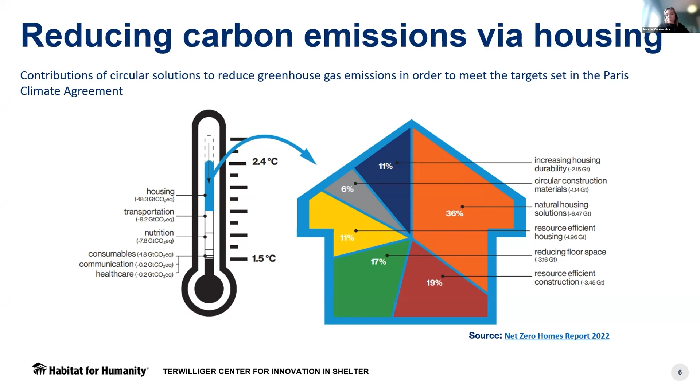What we know as Habitat, and what we've seen in working with these communities, is that the most impacted by climate change are also the most affected by the global housing shortage. Any measure that's going to support climate change, both from a mitigation or adaptation perspective, must incorporate housing needs.

So I'm going to share a couple examples of our work globally. The first example we're going to look at is about energy savings and efficient use of energy in house construction, in a way that engages communities in that solution.

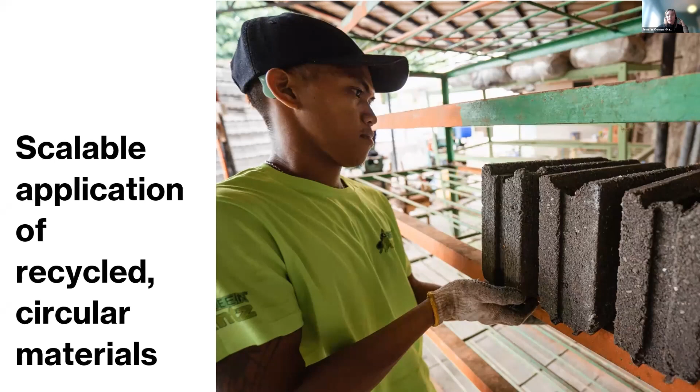The second example I want to draw from is focused on innovation in construction systems and materials, looking really at recycled content and circular building materials. A couple of years ago, Habitat was running our startup accelerator, supporting young entrepreneurs, and we found that about 25% of all applications worldwide were coming from recycled or circular materials, with a strong focus on recycled plastic and its role in the built environment.

The idea is to take plastic waste that wouldn't otherwise be recycled, or has essentially no value, and encapsulate it somehow in building materials. In Costa Rica, we partnered with CRDC Global. They have a RESIN8 product, which is a concrete additive that can be incorporated into all kinds of building materials, and we partnered with them to build homes in Costa Rica.

And in the Philippines, on the other side of the world, we worked with Green Antz, pictured here. This doesn't look like a plastic brick the way you might imagine, but it has incorporated plastic waste into the brick through a proprietary mixture, displacing some of the cement and sand additives.

Why is it blocked? Okay, let me try to open this. Sorry, I'm just trying to figure out why. Why can I not open it and move it? It looks like it's on the right-hand side. Do you need me to show it for you? Maybe that could help, because I don't understand why it's doing this. Okay, I can try. I think there's always going to be some technical issues, so I'm sure we'll find a solution. Oh, okay, now it has moved. Now with sharing, Sabina, you're sharing. Okay, fine, let's do it like this.

So I'm going to focus on nature-based solutions integrated into the urban fabric at many scales: healthy green buildings and communities, linear networked 3D greening.

Life outside buildings is as important as what happens inside them. Trees, water, light, and earth combine to create a public realm that is rich in natural green life. The well-being of those who live and work can only be enhanced by such a close relationship with nature.

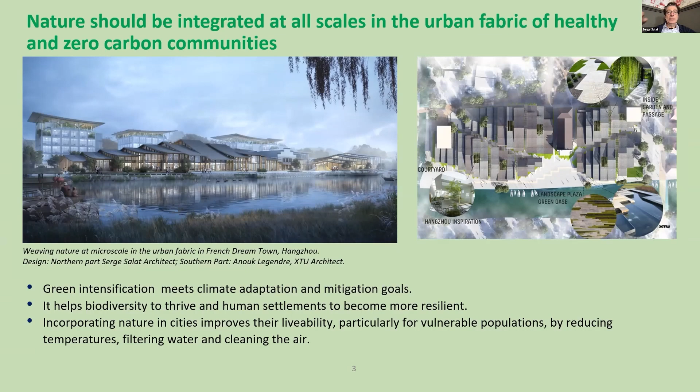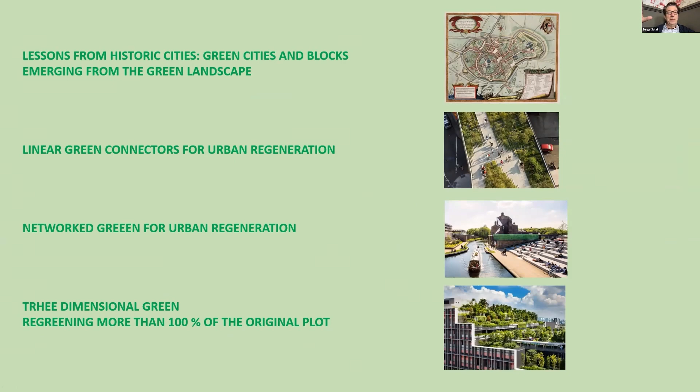There will be 4 parts, and I'll try to go through this in 10 minutes: lessons from historic cities, green cities and blocks emerging from the green landscape, linear green connectors for urban regeneration, networked green for urban regeneration, and 3-dimensional green, regreening more than 100% of the original plot.

First key message: historic cities were totally embedded into the natural landscape. They were not like now, totally sprawling everywhere and totally segregated. From everywhere in the city, this is Firenze, you could see the nature, you could see the fields.

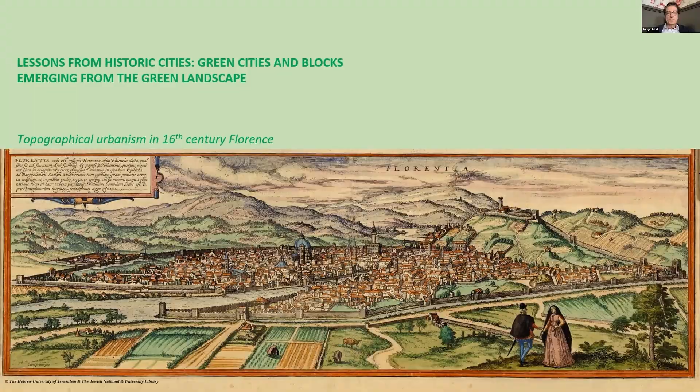The fields and urban agriculture were totally integrated, and the water was totally integrated too. I am in Bruges at the moment, which is a water city like Venice. The green, as you see here, you just have the center of the city. You have houses, I'm speaking from one of these house types at the moment. It's absolutely wonderful. The houses were along the blocks, along the streets, and the inside of the block was entirely green and cultivated or with beautiful gardens.

And this is the right way to build cities, actually: to have streets, houses along the perimeter of the block, and a super green block inside.

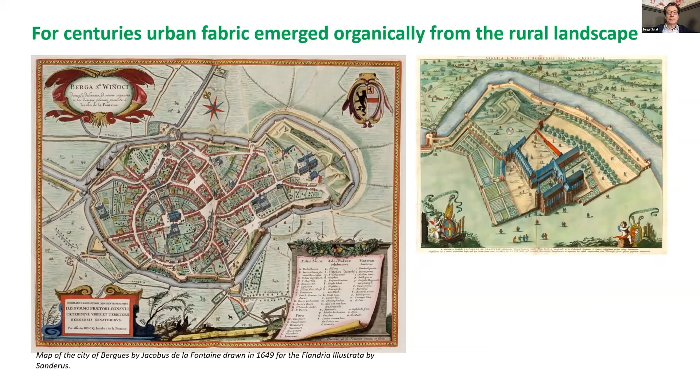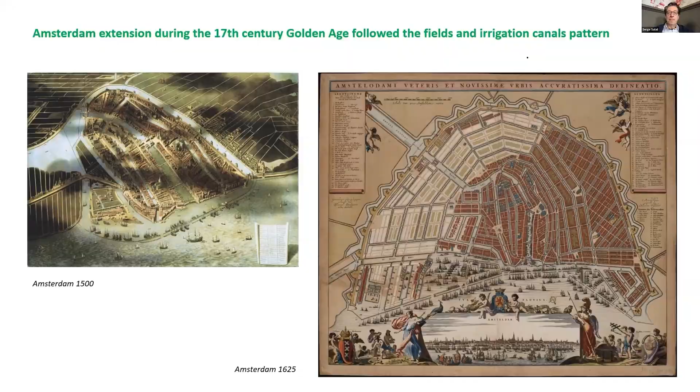When you move in Amsterdam, you may feel that you have the canals, you have the facade, but this is the inside of the Amsterdam blocks. And as you see, it's entirely green, but at the same time well-defined. It's a very urban environment.

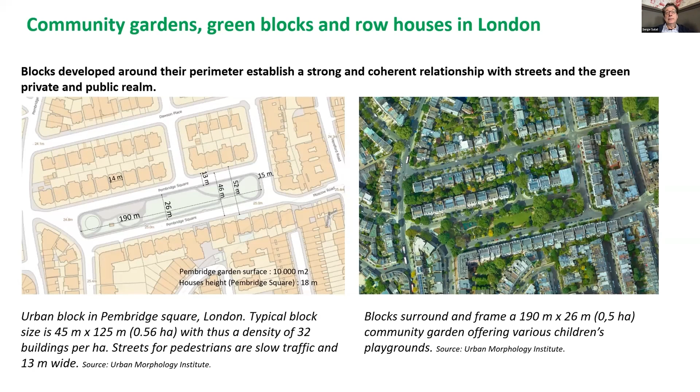Some benchmarks here: this is in London. You have these row houses again, where you see the layers of green, like we have done in the smart city in Hangzhou. You have layers of green behind the houses, and a common park in front of the houses, a small pocket park, 190 meters by 26 meters, but with a strong variety of different ecosystems and of different ambience and environments.

Okay, and this can be perfectly recreated in, this example was mid 19th century, but this can be perfectly recreated in contemporary green blocks like in Hammarby Sjöstad.

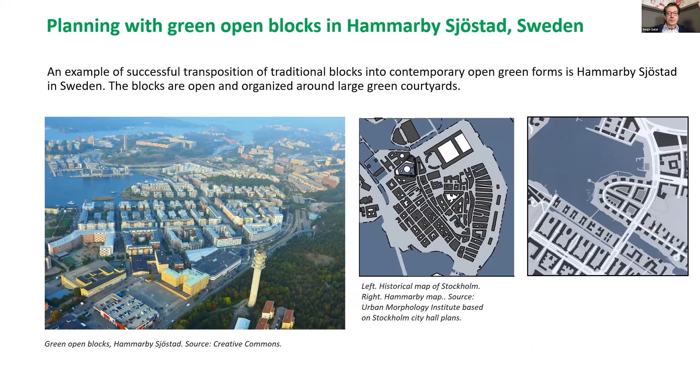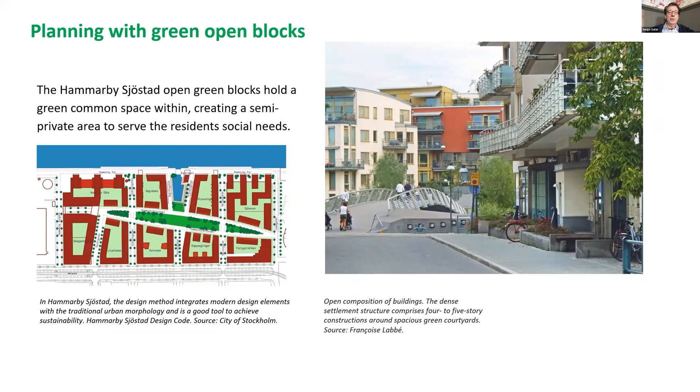Okay, where you see this is a quality program, and you see the same absolutely principle with a contemporary design, which is applied in an eco neighborhood in Sweden, with a common garden, with the inside of the green blocks, and with everything I've been showing you in London.

Urban linear green for urban regeneration. One key message I want to share with you is that green should be connected. And to connect green, you can make it linearly. This is High Line in New York. We're going to go fast on it.

The second key message is also that green is not just an informal piece of nature. Everything I've been showing you at the moment is very well designed, and the High Line is very well designed with different, it's imbrication, it's interweaving of architecture and green. It's not just that.

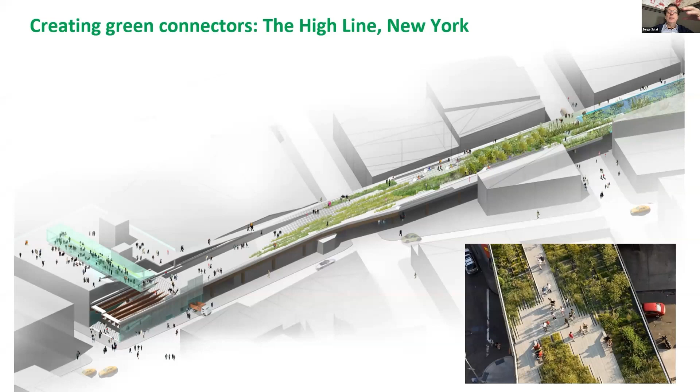And with also different ambiances, different atmosphere, where you can sit, you can relax, you can walk. You have different patches of a more wild environment and more natural environment. But then you have social activities. The third picture starting from the left, then a more dense New York environment. And this is what creates it - it's not like putting a piece of a forest inside of the city. It's really about designing the nature.

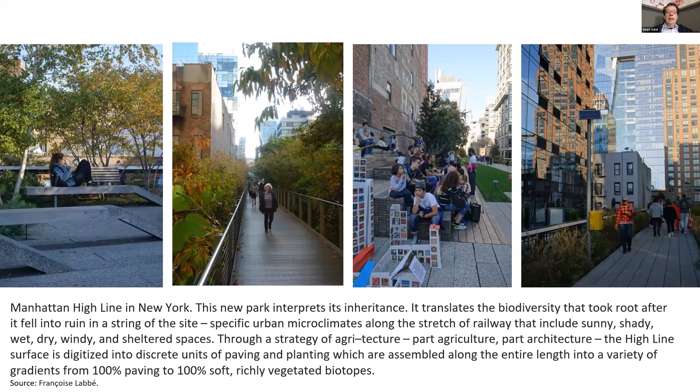And here you see the different ecosystems: the pit, the plains, the bridge, the mound, the ramp, the flyover, and this ensures the high quality of this linear park.

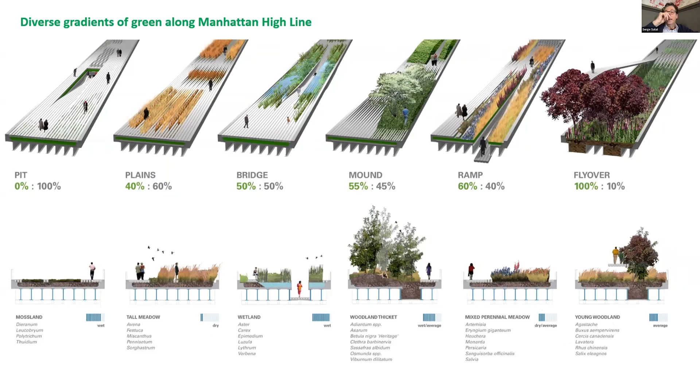What I want to really stress is the difference between the green space, which is something absolutely meaningless, and the park or garden. A park or garden is green space plus design.

Okay, and here you see the work of the architects and landscape designers.

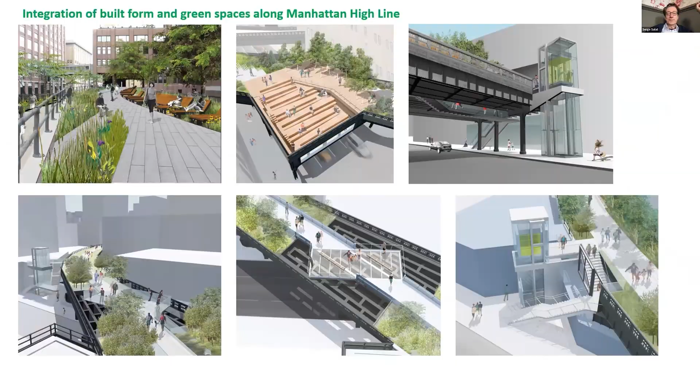Okay, now networked green. The example here won't be the High Line in New York, but will be King's Cross in London.

But you have 78 hectares of public green space, 28 parks, 2 cemeteries, 60 green spaces, plus 235 private open space, comprising 88 private squares, like the one I've been showing you in Pembridge Square, the one before. Gardens accessible to surrounding residents.

And then you have each park with its individual history, landscape features, user group profile, and local community. And each park is different. It's a different feel and essence. It's not just greening the side of a highway like in many Chinese cities.

The borough totals 166 hectares of green space, 14% of the land area. But when you had the big parks like Kensington Gardens or Holland Park, which are really accessible on foot - I have been living in this area, so I know very well - you have a total of 36 square meters of green space per resident.

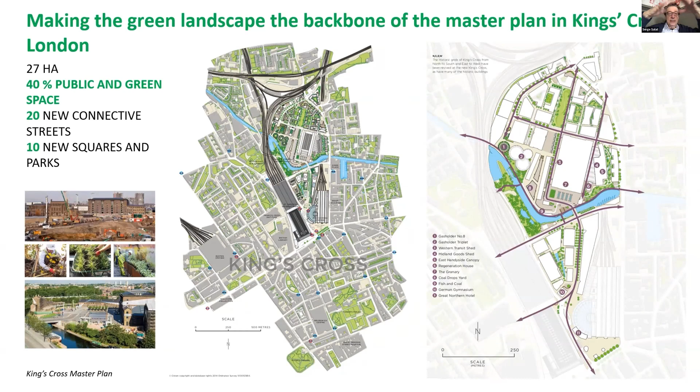And this is a legacy of history. But in a new project like King's Cross in London, the choice was done by the developers to devote 40% to green space, but not like a big park in the middle of the development - really to weave and create 10 new pocket parks inside the development. Here you see the master plan. And here you see that, oh, all this is an entirely new creation.

Yeah, and here you see the different ambience. Pancras Square, which is triangular and which has water getting down, sloping down towards the tower, the clock tower of the station.

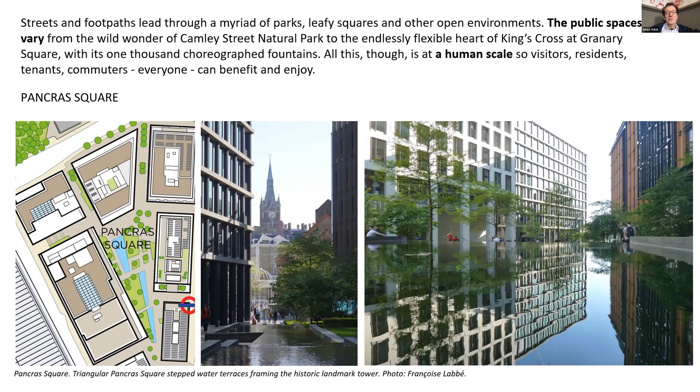Here you see the 1,000 fountains, which is also a garden of water in front of Granary Square. They have kept 10 heritage buildings. It's a small area, 27 hectares, but you have 10 heritage buildings. Here on the back you have the gas holders, and it's super people-centric.

You have some more formal areas, and you have the very rich ecology, and the Camley Street Natural Park, which is like a small stretch of nature right in the middle of London.

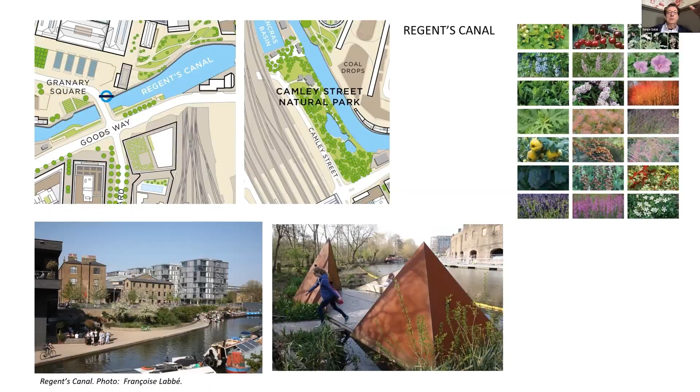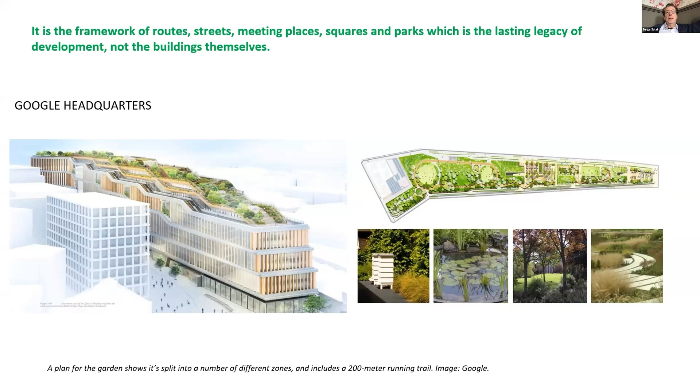Along the canal, which has been created at the time of the railways, you have Lewis Cubitt Park, and so many materials, and then you have this garden, which is like a work of art, which we have seen. And then you have the new addition, which is the Google headquarters, a 300 meters long garden on top of the building.

And this will be the end, the three-dimensional green. So what is the next step? When you see that, all the green is not on the ground - the green is on the 4th floor and the 7th floor. This is Kampung Admiralty in Singapore, which I like very much.

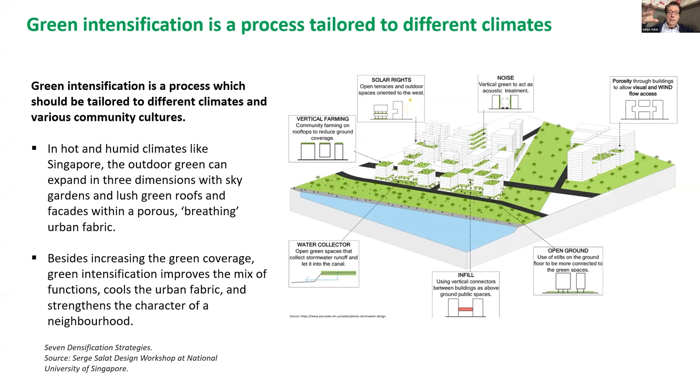Green intensification is a process tailored to different climates. In hot and humid climates like Singapore, the outdoor green can expand in 3 dimensions with sky gardens and lush green roofs, into a porous urban fabric.

This is a project I have done with my students in Singapore. This is a section of Kampung Admiralty, and now you see, compared to the view from the sky, that you have the green and the amenities for the children at the 4th level. It really looks like a recreation of nature, and then you have stacked uses.

It's a super mixed-use area with a food court. You have a healthcare center, the blue one on 2 levels, and then you have elderly and children amenities, and then housing, and a communal farm, which extends vertically from the 4th floor to the 7th floor.

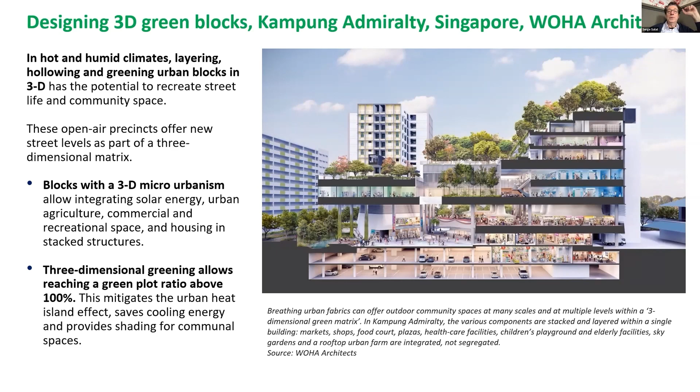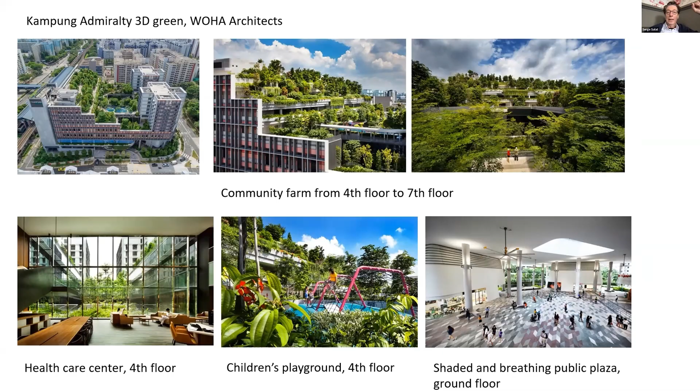This is a project I have been advising in Guangzhou, the Sino-Singapore city. We made with the World Bank and the Guangzhou planners the Knowledge Valley, in which we increase at a bigger scale the principles of Kampung Admiralty in Singapore - of the 3D green. The 3D green regreens more than 100% of the original plot.

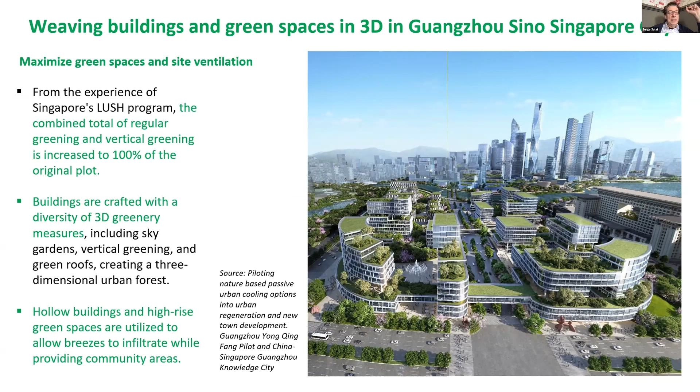Here you have exactly that. Buildings are crafted with a diversity of 3D greenery - sky gardens, vertical greening, and green roofs - creating a 3-dimensional urban forest. Hollow buildings, to increase the flow of air, allow breezes to infiltrate.

It's a hilly micro-topography. We have recreated the 3D landscape in this Knowledge Valley - low-lying areas, rain gardens, wetland parks, a tidal landscape where green areas meet water, and water is fostered. It's a combination of urban space and the recreation of an urban landscape and a topographical landscape.

The architectural design takes the connection with hills into full account. The use of stilts, three-dimensional setbacks, and other techniques are integrated with nature - elevated floors, staggered floors. So once again, design, design, design, design. I've been showing you design from the past to the most contemporary, and you see it's not just nature-based solution, it's designing with nature.

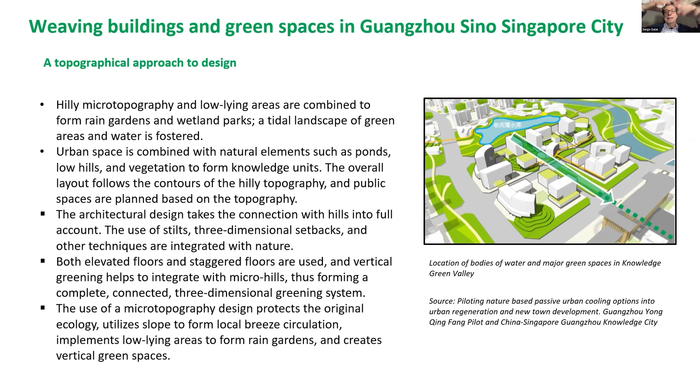Develop master plans around the green landscaping vision - not the classical way of developing a master plan around roads, but developing a master plan from a landscape project. Integrate green spaces with all infrastructural projects - housing, transport, business parks, community and health facilities - and an urban rehabilitation approach. So not just creating a master plan and greening it, but creating the master plan around the green landscape, and engage, of course, the local community.

Have a long-term perspective while remaining flexible. Green spaces are a long-term investment. They may need some time to establish before they are fully usable, and they require long-term maintenance. The benefits may only become apparent over time.

That's why with the World Bank, we make ecosystemic accounting of the benefits, making the case for green spaces, because they cost money actually. You must not think that it comes just for free. But they bring much more benefits than they cost.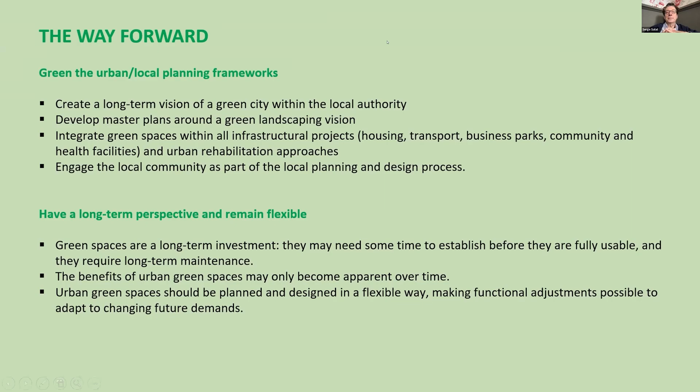Great, thank you, Serge. Thank you for your long-term commitment to the GPSC process you've been talking about, and a really rich combination of historical examples of how cities can be built with nature and greening in mind, and around those frameworks, but also modern examples which hopefully people can relate to and think through possible uses of this type of approach in their context. So I think again, really great content there, and looking forward to picking up more in the dialogue at the end. Please be putting in any questions that come to mind into the chat box.

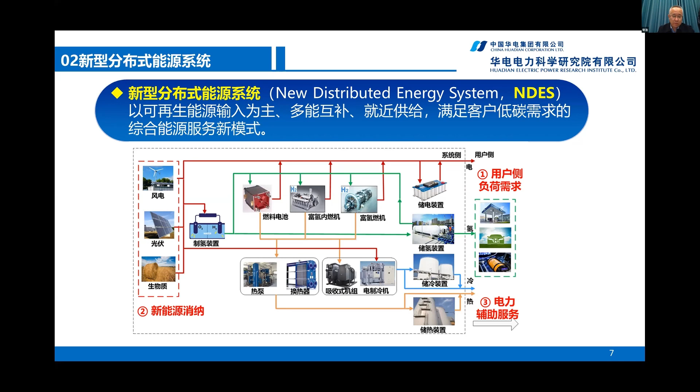The energy production side includes a high proportion of solar energy, wind energy, and biomass energy, using hydrogen energy as the carrier to realize the transfer and transformation of energy in time, space, and grade. The energy consumption side takes nearby supply as the main principle, with energy conversion equipment including fuel cell, gas turbine, internal combustion engine, refrigerator, electricity storage, and cold storage.

I want to introduce to you several key technologies of NDES. First, the multi-energy complementary system integration technology.

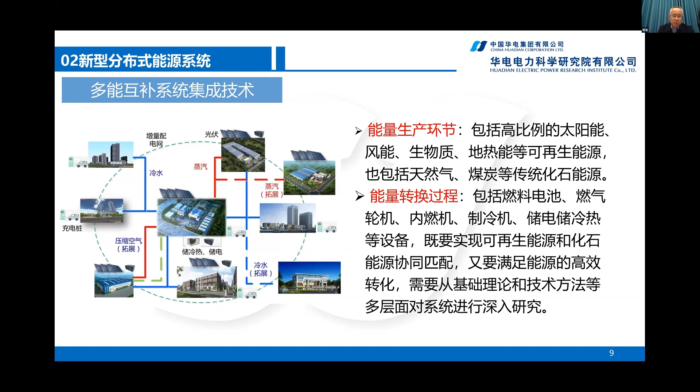The new distributed energy system includes the energy production and the energy conversion process. Energy production includes a high proportion of new renewable energy sources such as solar energy, wind energy, biomass, and geothermal energy, as well as traditional fossil energy sources such as natural gas and coal. The energy conversion process includes fuel cell, gas turbine, internal combustion engine, refrigerator, electricity storage, and cooling equipment, etc. In order not only to realize the coordination of renewable energy and fossil energy, but also to meet the efficient conversion of energy, it needs in-depth research on multi-layer systems such as basic theories and technical methods.

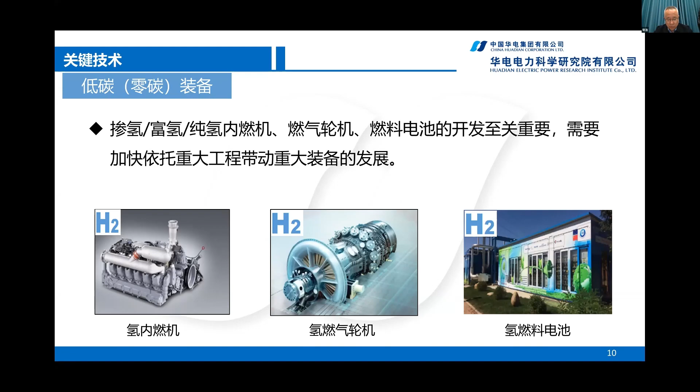Secondly, low carbon, zero carbon power equipment. This is an important factor that directly restricts the development of distributed low carbon systems, and the development of hydrogen-doped and hydrogen-rich pure hydrogen internal combustion engines, gas turbines, and fuel cells are critical. So it is necessary to accelerate the development of major equipment by relying on major projects.

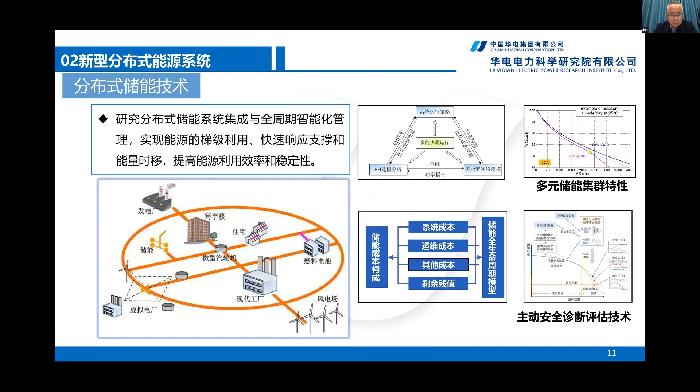Thirdly, the distributed energy storage technology. This technology is a form of energy storage configuration with small capacity and power, which can be stored through electricity, heat, cold, and other forms. The application scenarios of distributed energy storage can be divided into power generation side, distribution network side, user side, and the microgrid, etc.

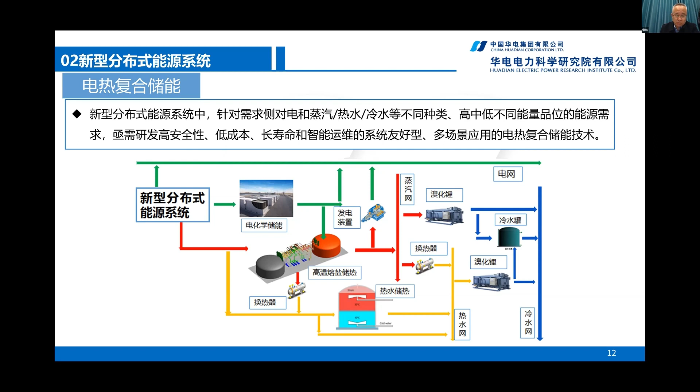Fourthly, the electric thermal composite energy storage technology. It is urgent to develop a system-friendly, multi-scene electric thermal composite energy storage technology with high security, low cost, long lifespan, and intelligent operation and maintenance.

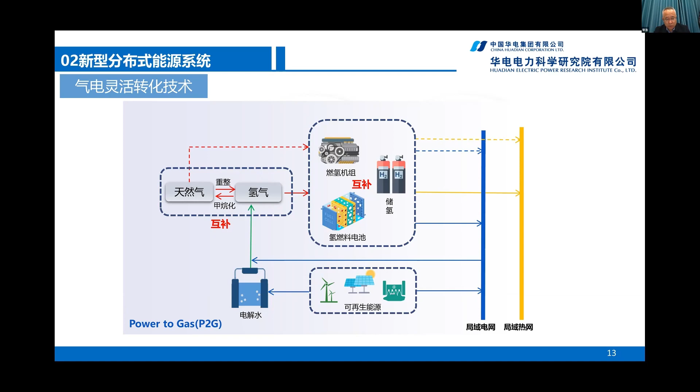Oh. Okay, yeah, I'm sorry.

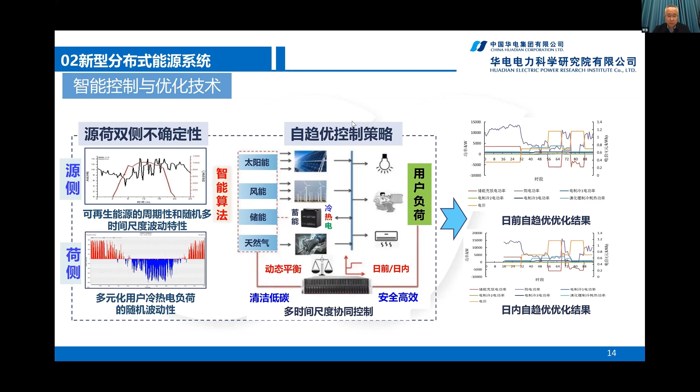The third part is that we are currently carrying out research and practice work related to the new distributed energy sources. Due to limited time, we will choose three directions to share with you, all experts.

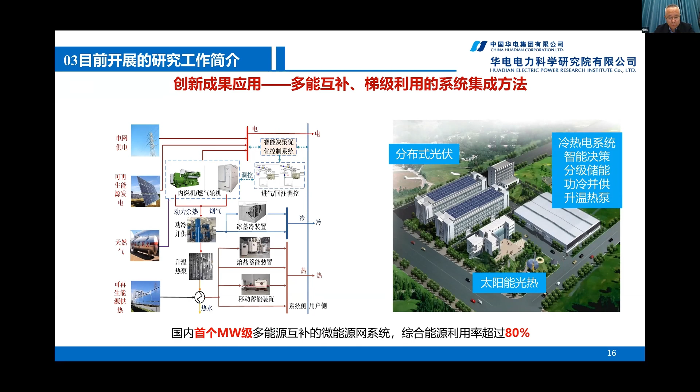The first is the integration direction of the multi-energy complementary system. Based on the National Energy Distributed Energy Technology Research and Development Center, Equipment Platform, and the National Key Research and Development Project, and combining with the Institute of Engineering Thermophysics of the Chinese Academy of Sciences, in view of a variety of energy grade characteristics and complementary mechanisms, we have carried out research and put forward the complementary and collaborative mechanism of cascade utilization.

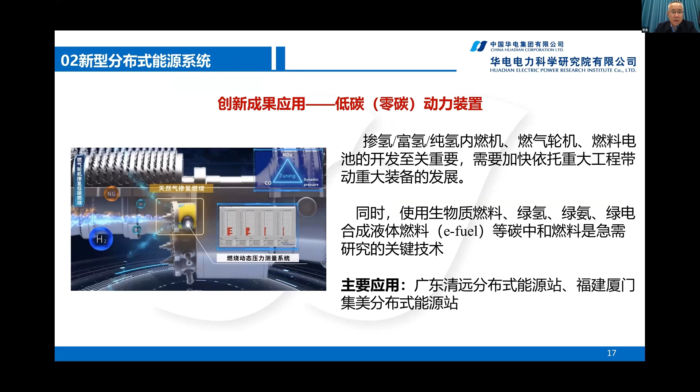Secondly is the direction of low carbon or zero carbon power plants, where hydrogen energy will be an important starting point for the green and low carbon transformation of traditional energy. The third is the distributed energy storage direction, relying on the National Energy Distributed Energy Technology Research and Development Center.